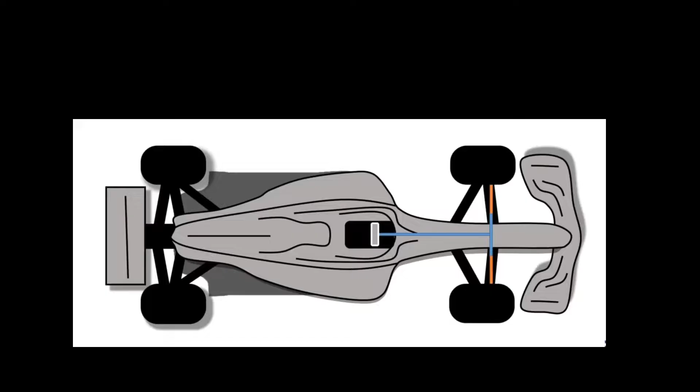With approximately 70 variables, not including any dive variables for a suspension, it's fair to say that there is an infinite number of suspension setups. And now, with the possibility of DAS, that's dual axis steering, recently released by Mercedes, that becomes infinity to the power of Grayskull.

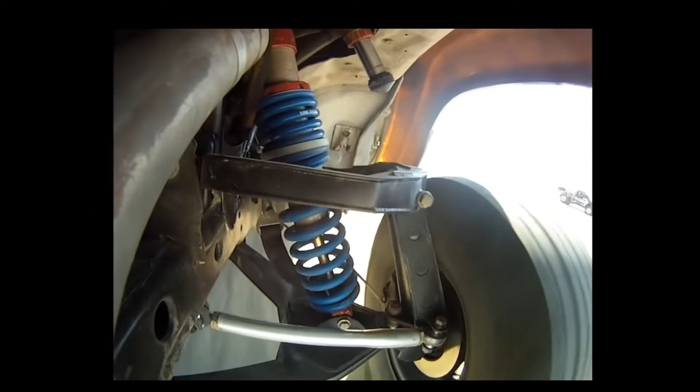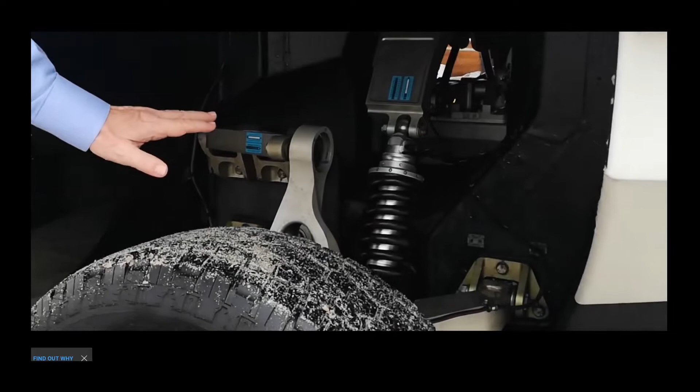Good smooth ride. You can see we have normal suspension. The suspension is upper and lower wishbones, but the difference for us is that we retract the wheels when we get into the water in the same way that an aeroplane retracts its undercarriage.

What the fuck? Holy shit, dude, what's the matter? What happened?

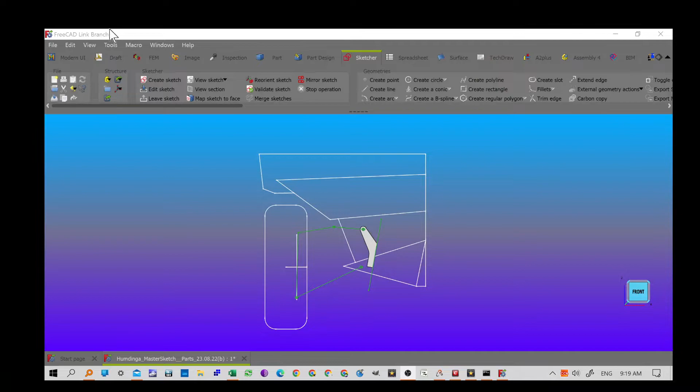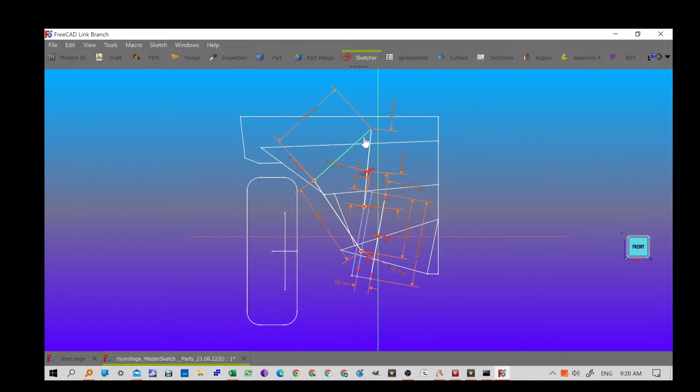Without a single iota of knowledge of suspension design, God knows why, for some reason, I felt compelled to cut my teeth on a compound 5-bar linkage. It'll be good practice, right? At some point I realised suspensions are three-dimensional and there's nothing symmetrical about them at all. But it looks good in 2D though. Good smooth ride.

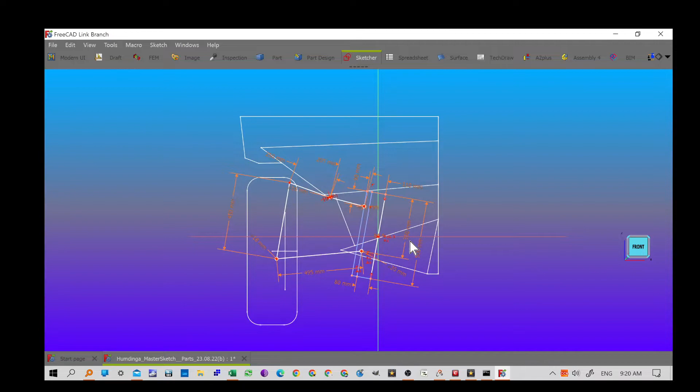Proceed straight to fail and do not pass go. Suspension design had rolled me over a barrel, so to speak. Battling COVID and other chronic health issues, I was determined to turn the table on this bitch.

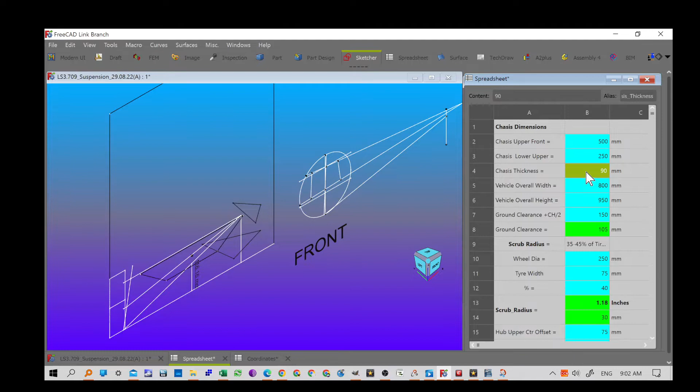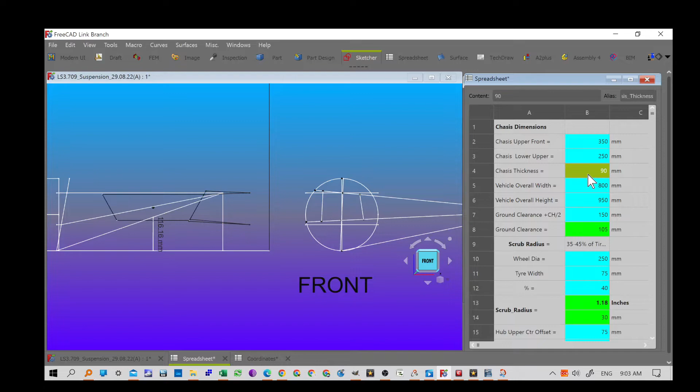I'm not really wired for producing tutorials. There are plenty out there anyways. The purpose of this video is to show industry that FreeCAD can handle one of the most complicated systems, if not the hardest design system, in seconds.

Think about it. How long have humans been racing for? There is still no one size fits all, and there never will be. As I've said before, there are over 70 variables in the front end alone. I won't go through them all.